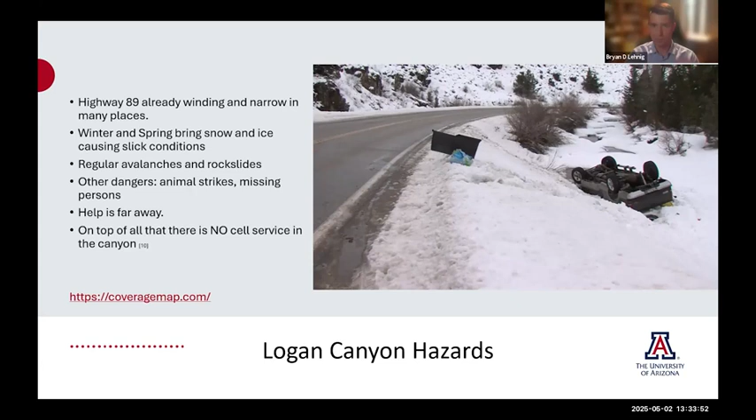On top of all of these problems, there is no cell phone service in the entire canyon. If you look at this screenshot of a map I took from coveragemap.com, the purple areas indicate places of cell service. Logan Canyon is right in the middle of that, and there is no cell phone service whatsoever.

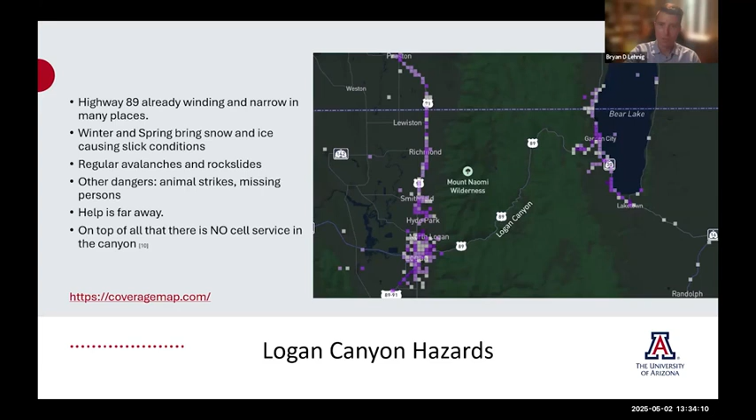My solution to this problem is installing cell phone towers to help mitigate these eventualities. So the goal of this project is to find the optimal number of cell towers, their locations, and their heights to provide service for Highway 89.

To reach this goal, there are a few questions that need to be answered. One is where are the cell tower locations? Another is how tall are those towers? And also, what are the building requirements for towers? You can't build a tower on a cliff — that just doesn't make sense — so we need to find the areas with adequate slopes for these towers.

For techniques, I can look at former research done on similar projects to see what data and methodologies people have used, and maybe follow something similar. Then at the end of my analysis, I'll do a cost-benefit analysis looking at the optimal height and optimal location for these towers, and finally look at my methodology to see how I can improve upon it.

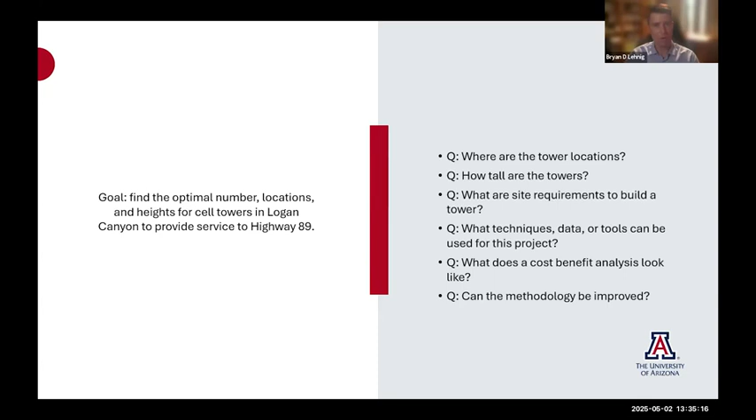Before we do an analysis, let's quickly talk about how cell phone towers work. Cell phones and cell towers use radio waves. These radio waves are fairly weak, but like any other wave — visible light or sound waves — they are strongest when emitted in a straight line, or line of sight. It doesn't mean they can't bounce off objects through reflection or refraction through the atmosphere, but when that happens, the signal strength decreases.

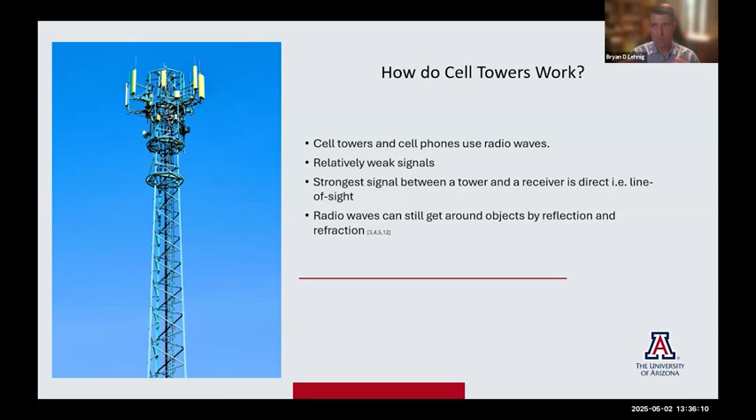This has to be accounted for when performing a viewshed analysis, especially in a place like Logan Canyon with difficult topography. When we want to place cell phone towers, we want to put them where their direct line of sight is predominant, so we can utilize that to the max.

Looking at former research done on similar topics, I found an interesting pattern where the research fell into one of two categories: either the study areas were in rural locations or in urban locations. If it was a rural location, it was typically large areas.

Like counties or regions, the data they used was a digital elevation model. What they were trying to do was build upon an already existing telecommunication system, and their viewsheds, their methods were simple viewsheds.

Whereas in urban locations, typically like cities or oftentimes college campuses, because the buildings were tall and close together, a digital elevation model or a DEM just didn't quite cut it. It wasn't detailed enough, so they resorted to using LiDAR and built 3D models using that LiDAR. They did perform viewshed analyses, but they also worked with reflection and refraction analyses to really get an accurate look at where cell phone signals could reach.

The reason I bring up this dichotomy is that Logan Canyon is kind of a weird combination of both of these. It is a rural location, there aren't a ton of buildings, it is a large area, but because of its complex topography, with cliffs and being in a national forest, there are tall trees, especially at the bottom of the canyon where we are interested, because that's where the highway is. These trees and cliffs kind of act like tall buildings in an urban environment.

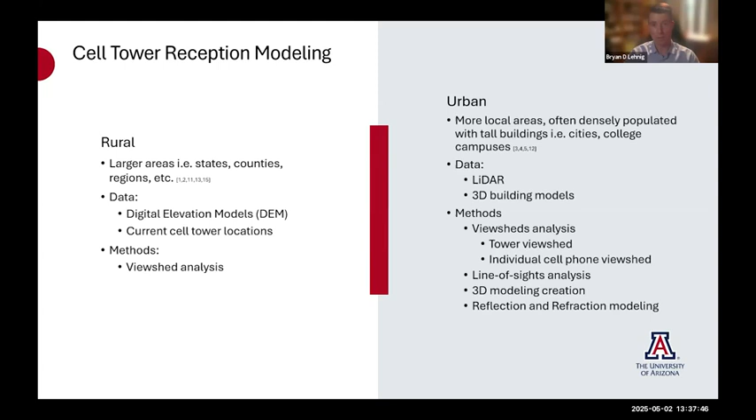So when performing an analysis, you want to take that into account. You want to try to incorporate those methodologies.

Other factors that came into these former research: signal attenuation. Some people accounted for signal all the way out until signal loss, while others cut it off at a certain threshold, saying, hey, we understand that signals may continue, but even at a certain point, your cell phone just can't do anything with this weak signal.

Others also accounted for the construction areas of cell phone towers. You can't have them on a slope steeper than 10%. They need to have a minimum square footage of 1,000 square feet. You also need to have easy access for maintenance. I built a lot of this off of the Cache County zoning laws for cell towers that I was able to find, so using these methodologies, I was able to build upon my own methodology.

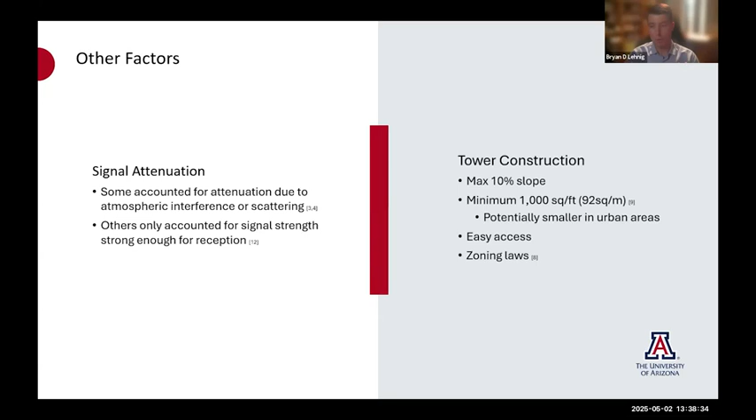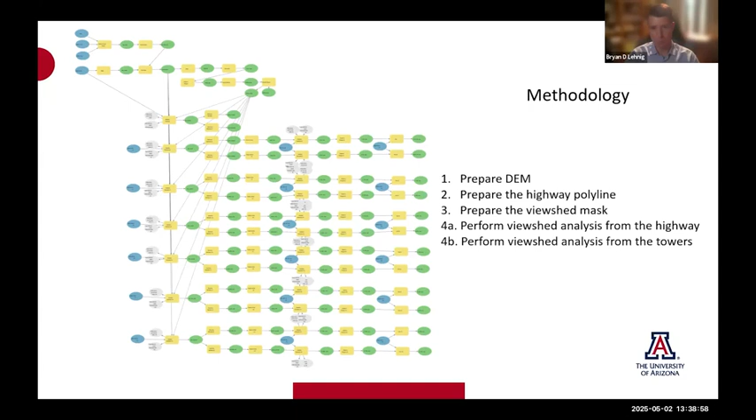Speaking of that, this is an outline of my methodology. You can see my model on the left. I had two data inputs: basically a DEM and a highway polyline. From that, I was able to create a viewshed mask, which I will get into later. Then I performed a few viewshed analyses to find out the location of towers and then their individual viewsheds.

Moving on to my digital elevation model, it was a 10-meter resolution DEM that I got from Earth Explorer, and I merged those two rasters together. I also had to reproject the DEMs to get a vertical datum so that a viewshed could be performed.

To reduce my processing time, I also cut down my raster using a buffer that I created from this highway. That way, when running a viewshed later, it wouldn't be calculating cells way out there. We just need the stuff immediately around the highway, which can be seen.

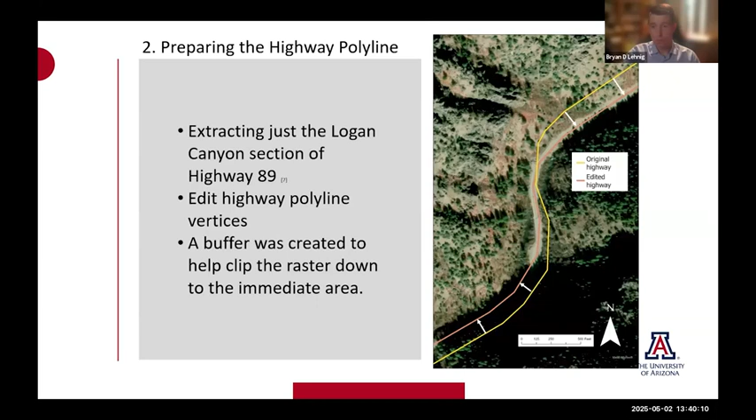So the viewshed mask, I wanted to incorporate the requirements to build a cell phone tower: again, less than 10% slope in areas that were greater than 1,000 square feet. Using that clipped DEM that I created, I asked the computer to create a slope raster, which this map here on the right shows all the areas in the canyon and their slopes. Then I asked it to single out areas that were slopes of 10% or less, and from that, I was able to extract areas that were also 1,000 square feet or bigger.

So the resulting map is this. Everything in green is, shall we say, the right building construction area for a cell phone tower. It's 10% slope or less, and it's 1,000 square feet or bigger. Using that, I can start performing a viewshed analysis.

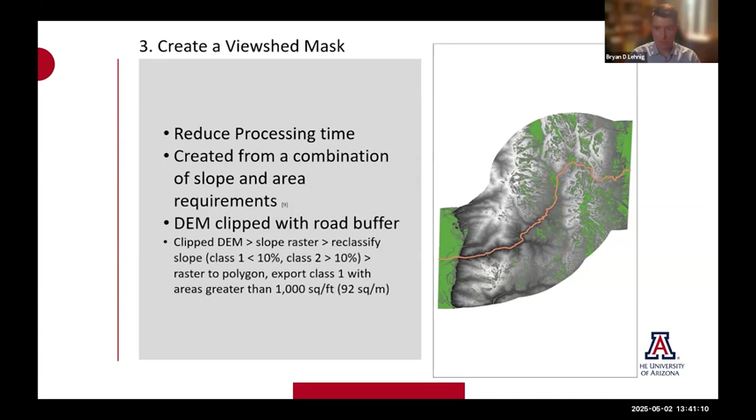The viewshed analysis first started from the road. I needed to see what areas from the road can be seen, so those would indicate a good location to start building towers, and those areas would only be in that viewshed mask. So my inputs were my digital elevation model, my highway polyline, and that viewshed mask.

I also incorporated heights from the Cache County cell tower zoning laws, which I'll show in a second. Each height was accounted for, and then I would later turn those around and perform viewshed analyses.

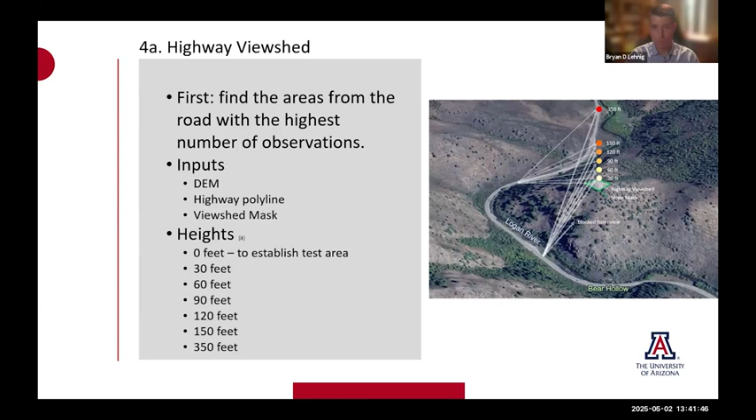This helped me narrow down the locations where towers could be placed. I opened up the attribute table, identified the cells with the highest values, and came up with these two locations. I could have found a third, fourth, or fifth tower location, but those values were so low that they wouldn't have added any meaningful coverage to the road.

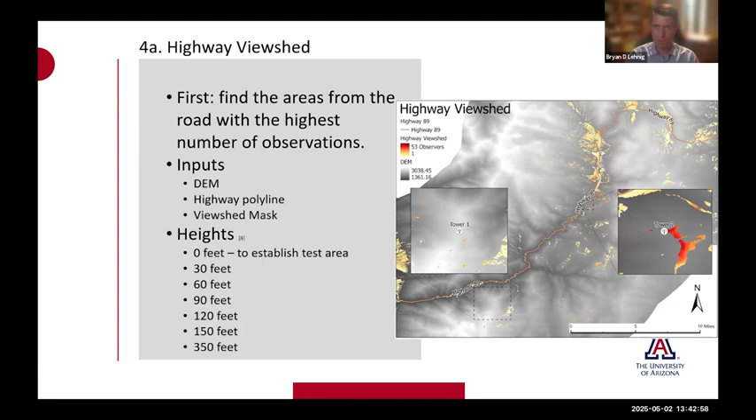So we have tower 1 with the highest value of 53, and then tower 2, a little bit further north, deeper into the canyon, with a value of around 46 - I can't remember off the top of my head.

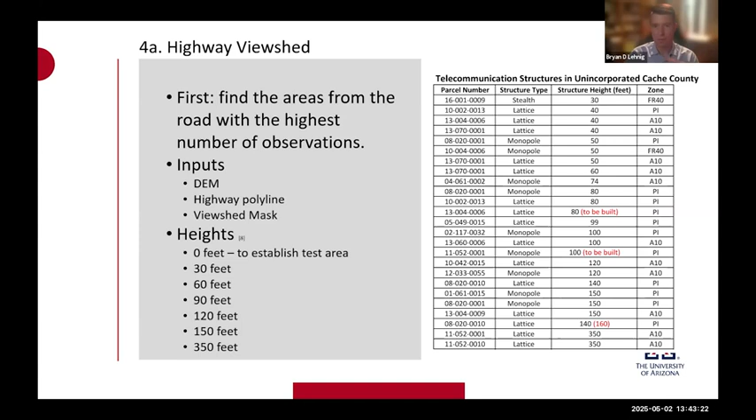Again, these are the heights I chose based on the Cache County zoning laws for cell towers. Instead of doing an analysis for each individual height, I did it in increments of 30 feet, from 30 to 150 feet, and then added two outliers of 350 feet for the final analysis. Once those locations had been determined, I reversed the viewshed analysis and started doing it from the individual heights of those chosen towers.

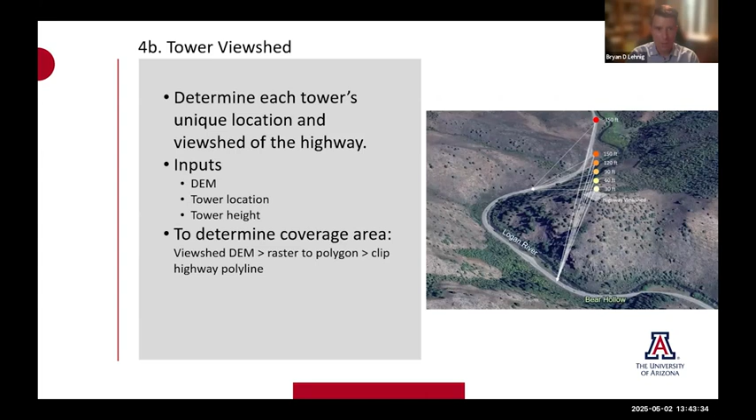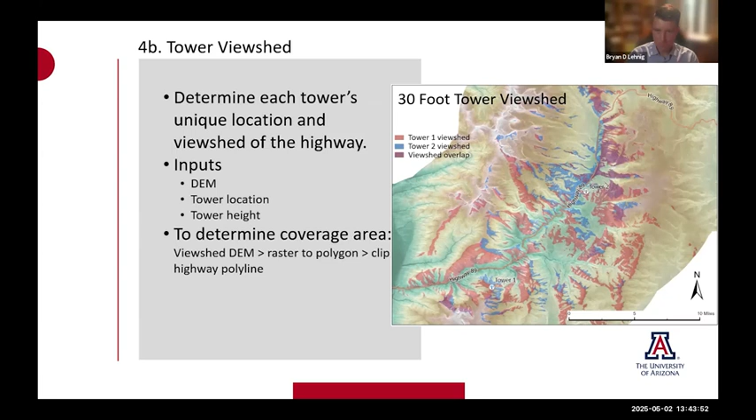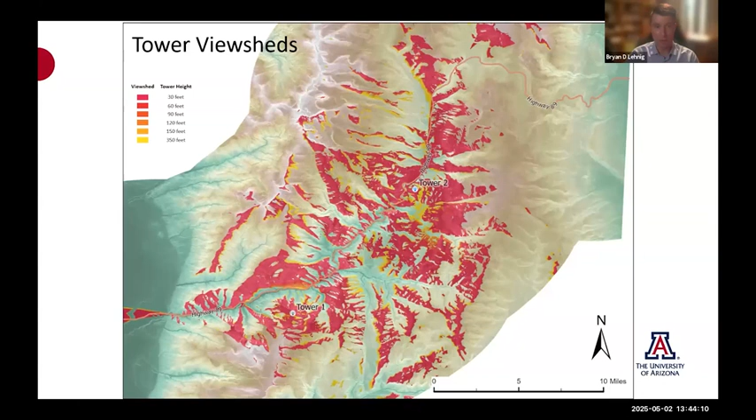Again, as you notice, even though we have 30 feet of increase per tower, it's not even increasing the percentage of the road covered by 1%.

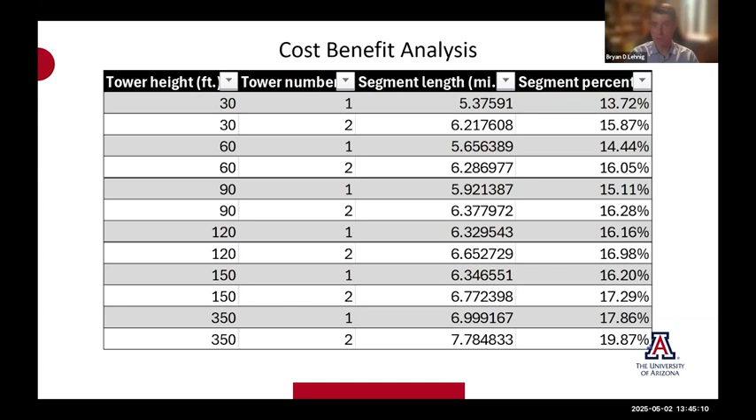So if you were to ask me my recommendation for installing cell phone towers - there are obviously other factors that go into determining tower locations and heights, but my recommendation for a low-cost solution is installing 30-foot towers. Combined, they cover approximately 30% of the canyon road, while a tower that is 12 times the height, the 350-foot tower, only covers approximately 38% of the road - only an 8% difference.

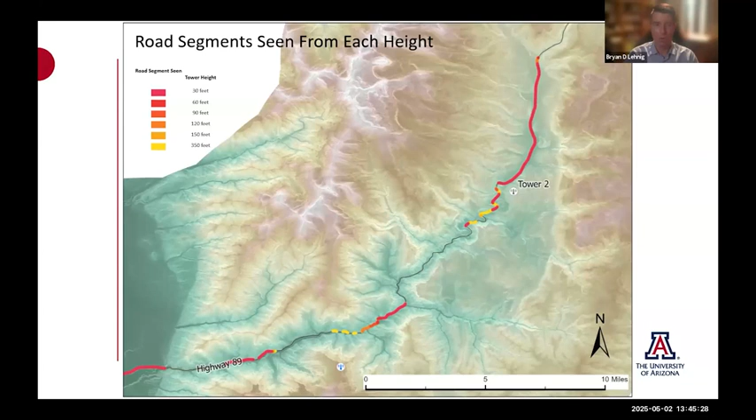To further nail that in, here's a map of the road that is covered. The red indicates where the 30-foot towers can cover, and the lighter the color, the taller the tower. Again, there's not much change over this area. So that was my initial analysis.

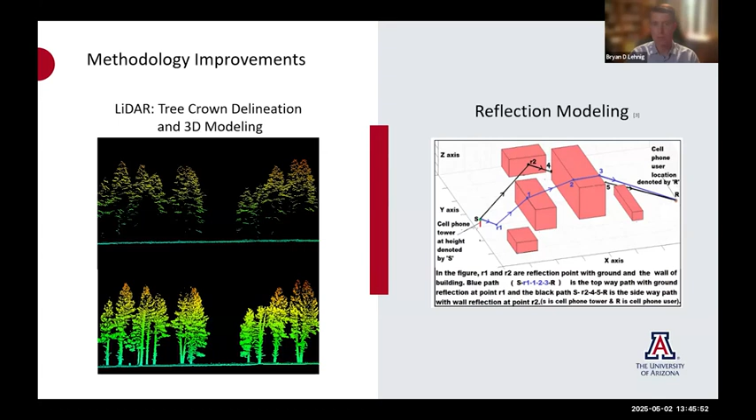Upon reflecting on this analysis, there are some things I can change - adding LiDAR to detect where trees are, or using reflection analysis to get around trees or cliffs, or areas deeper in the canyon that a direct line of sight can't reach. Using this can help improve a viewshed analysis.

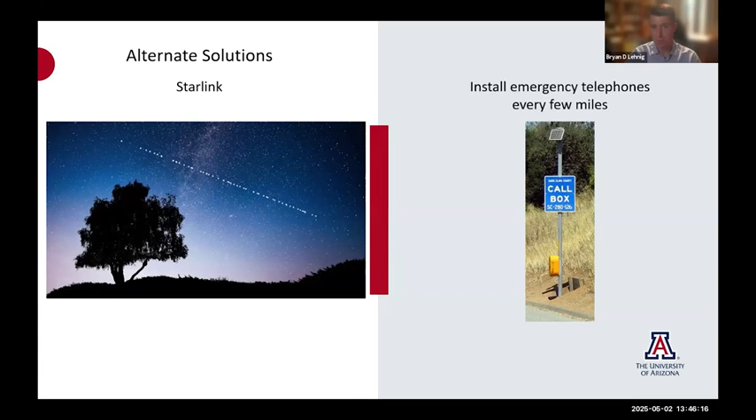For alternative solutions, maybe this isn't the best approach. You can see a future where Starlink or technologies like that are more ubiquitous, allowing reach to places where telecommunication towers are not conventional. Or if you want a more low-cost solution, installing emergency telephones every couple of miles is also an easier and cheaper way of doing it.

But I think that if you want an effective way to approach this problem, with good planning and research, a low and cost-effective solution would be to install a couple of cell phone towers within Logan Canyon. Thank you for your time.